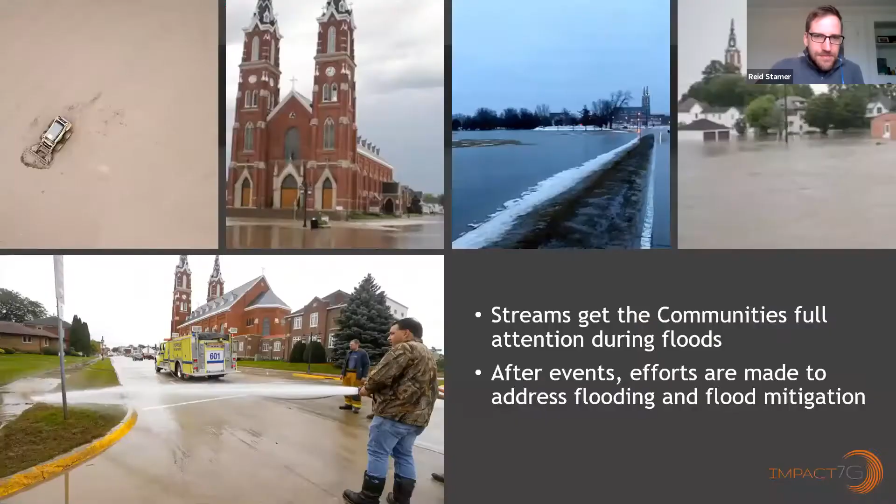And so, oops, sorry about that. Let me get started to look at the watershed that this project is located in. It's the headwaters of the North Fork of the Maquoketa River watershed, basically in this HUC 10 that goes, basically Dyersville is about in the center of it, down to Cascade.

And the city of Dyersville itself is at the confluence between Hewitt Creek, the North Fork of the Maquoketa, and Bear Creek. And if you can see in this photo, everything that you see that's hatched is floodway.

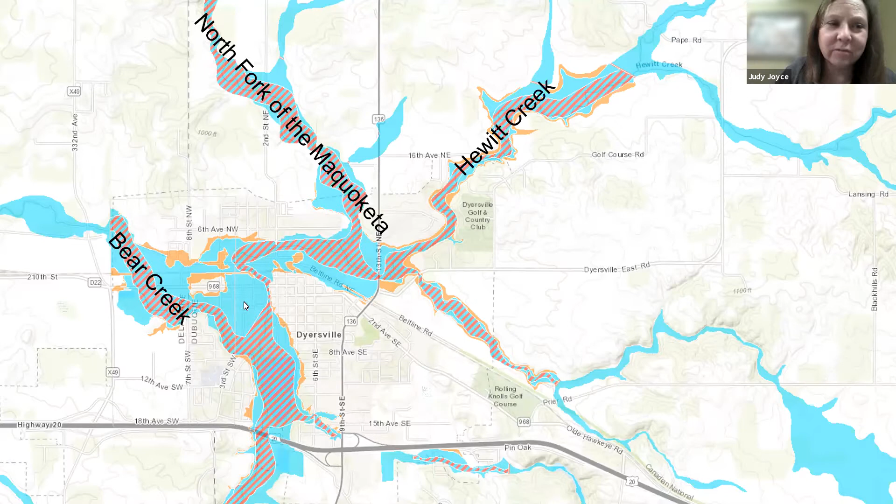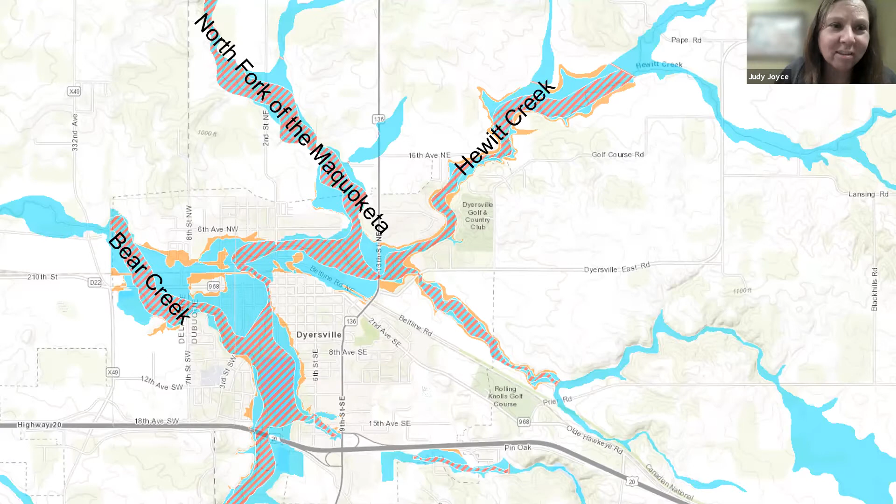And then everything in this sort of blue and brown color, that's floodplain. So if you can see here, the outline of Dyersville, I'm hoping you can see that on your screen, is like this, that they're very aware that the creeks are in their backyard. They're especially aware when it floods. So they've been flooded, you know, several times.

However, the rest of the time, which of course is most of the time, the creeks are not flooding and they're pretty much ignored. There's limited access to the creek. There's limited recreational opportunities with the creek. There's very poor aesthetics, and there's no real connection to the communities. The creeks are not a destination. They're not incorporated into the trail system, and really they have been ignored.

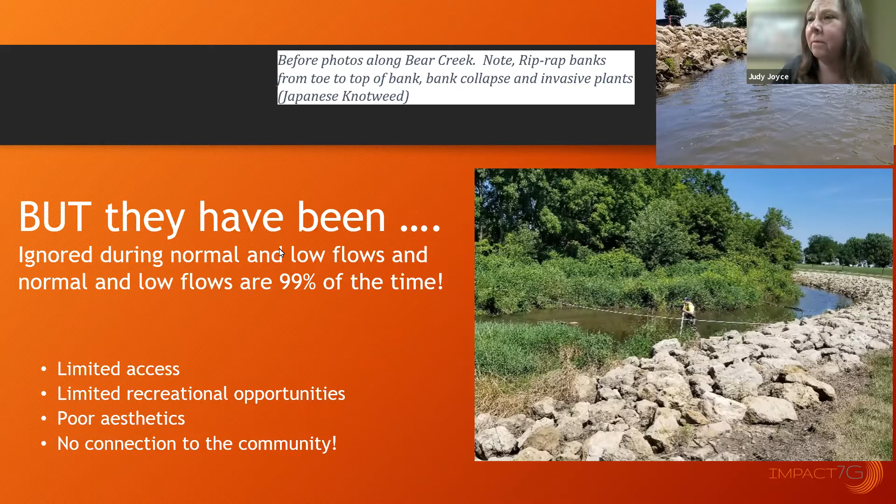And so when we met with the City of Dyersville, they were really looking at how can we change this? And we started making these different connections. How can we connect the community to the water? How can we connect it to the creek?

And the first thing we did is we rebranded the watershed. So this is sort of a new concept for me as a geologist, to start thinking of myself as someone who does marketing. But we basically gave this watershed a new name, and we called it the Field of Dreams watershed. And what this did is, when I would tell people about some of the issues in this watershed with water quality, with erosion, and that the community was trying to do best management practices to improve water quality and reduce flooding, it was hard to get people excited about it.

But if I said something like, hey, have you heard of the Field of Dreams watershed? And they'd be like, oh, what's that? And then I could go into my spiel. So really, just by branding the watershed and connecting it to the Field of Dreams, we were able to get some momentum and some energy behind the work that we were doing.

And so what started, sorry about that, what started some of these efforts was a brownfield redevelopment within the City of Dyersville. They basically took a contaminated site and cleaned it up, and then converted it, part of it is a brewery, the Textile Brewing Company in Dyersville. If you're in the area, please take part in the brewery. Enjoy the water. There's also a new housing development there. And then they were looking for ways to improve access to the creek.

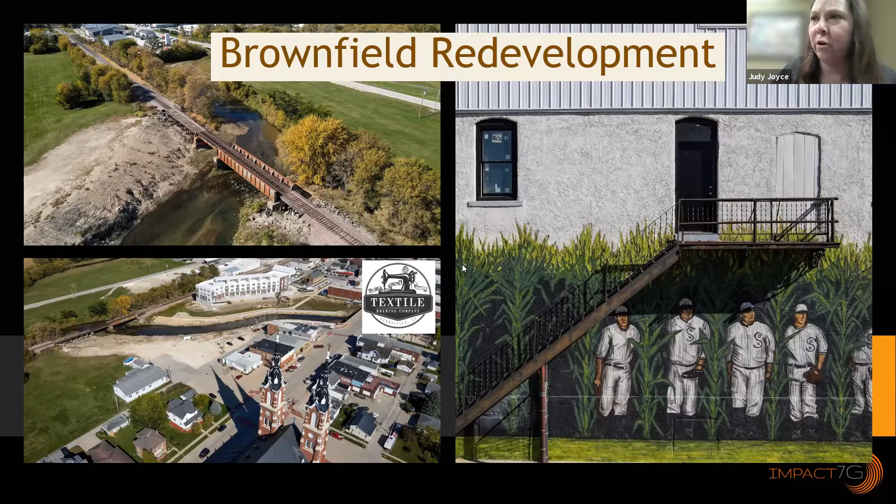And so we worked on a concept plan looking at restoring Bear Creek, which is this creek here, and the North Fork of the Maquoketa. This was the brownfield redevelopment area with Textile Brewery. And then they were looking at a little pocket park here. Their goals were to restore these creeks, to do some water quality practices with oxbows and wetland restoration, to improve access to these creeks, and to improve some recreation along those creeks.

Things like inner tubes, kayaks, wading in the creek, other sort of passive activities that you could do along the creek, with this sort of motto, again tying into that Field of Dreams watershed, that if you build it, you will bring people back to the water. You will bring people back to this community.

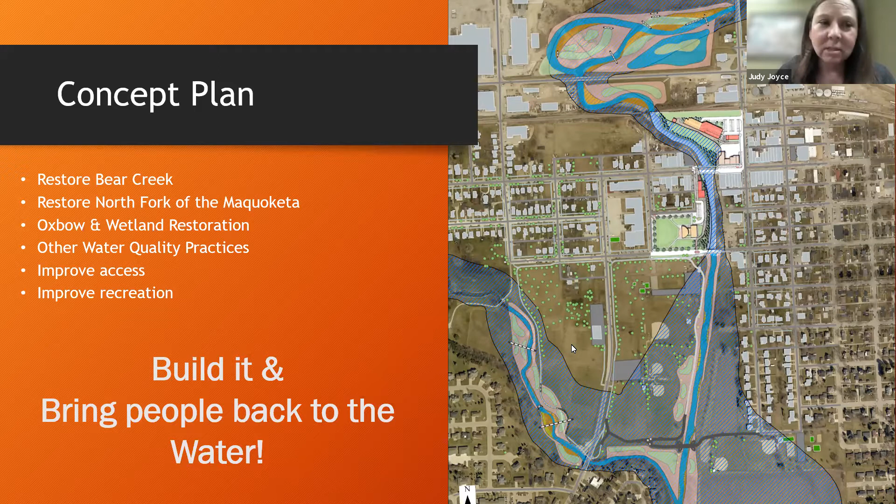And so the question came, where's the funding coming from for this? So at the time, they were working on updating their wastewater treatment plant, and they were using state revolving funds. And so with the state revolving loan funds, a lot of communities use this money to finance any water or wastewater improvement project. The nice thing is these are low interest and they're spread out over 20 years. So it's a great way to finance something if you don't have the capital.

But then not too long ago, they came up with what's called a sponsored project program. And what this is, let's say you borrow $1 million for a wastewater treatment improvement, and over time, your interest is going to be 1.2 million. What they'll end up doing is, rather than paying that money in interest, you could use that money instead for a water quality improvement project.

So in a way, it was sort of like free money. Instead of that money going to the bank or going back to the state in interest, you could use that money as a water quality practice. And this had been done to do things like pervious pavement, stormwater wetlands, biocells, but it hadn't really been used for stream restoration before. And that's what we wanted to use it for.

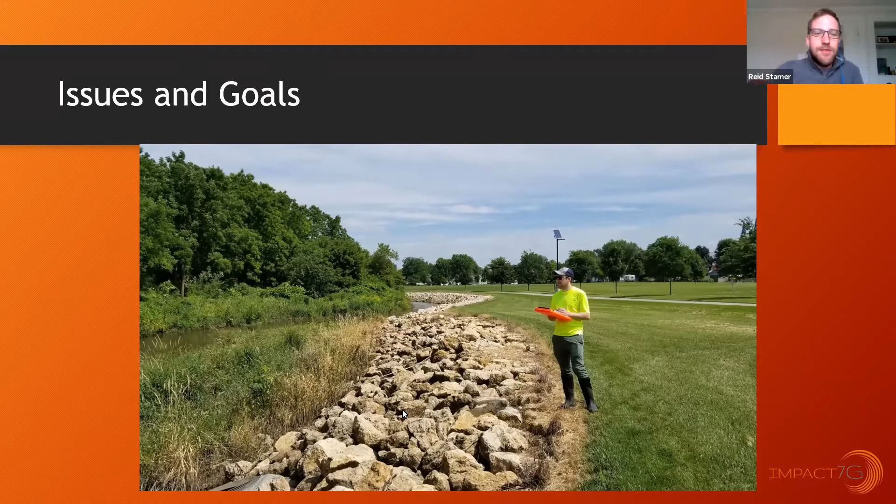Another issue that they were not aware of, and I made them acutely aware of it, is they had Japanese knotweed growing in one distinct patch along Bear Creek, and it likes to spread downstream by breaking off stems, and it'll root at every little node on this plant. So it was something we definitely wanted to take care of before it got any worse. So that was another issue. Next slide, please.

And yeah, there were some issues with how the channel had been migrating. It was actually trying to self-adjust in some areas, but because of the amount of riprap and rock they had put in, it added a constraint so that the stream wasn't able to self-adjust and do what it is supposed to do, which is good. It means that the stream is working or trying to work, so we just need to nudge it in the right direction.

And then some of the other issues would be other erosion control methods that maybe weren't sanctioned, where they just dump concrete in. It's something you see on a lot of stream banks, where they put these big flat stones that are just old sidewalk. They're really, really bad at holding stream banks together because the water can still flow beneath them and pipe underneath. So that was another issue.

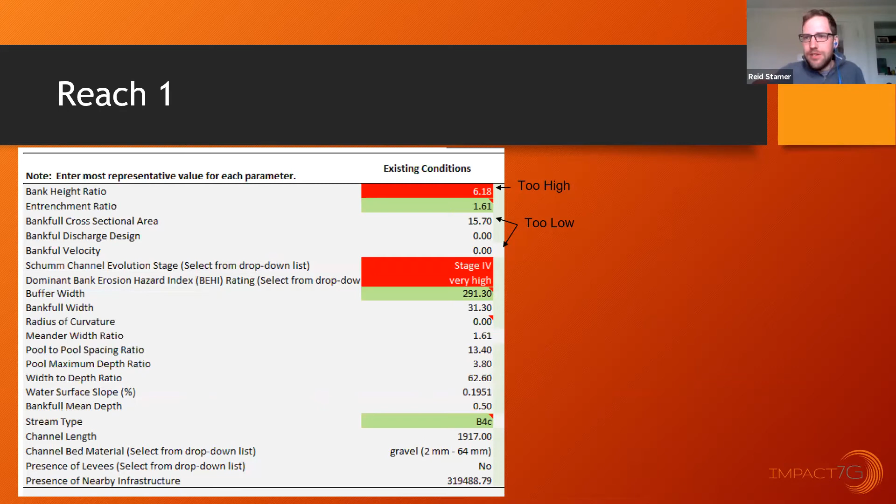So we took all our measurements, filled out the spreadsheet, and turned it into the DNR to Nate Hogeveen. He's the river coordinator, the guy who reviews all this. He looked at it and said, this bank height ratio is crazy. It's way too high, the cross-sectional area is way too low, and the velocity is off the charts too low. And I was just like, okay, well, what ranges is it supposed to be in? How does the toolbox actually work? So he gave us some suggestions to try to tweak that.

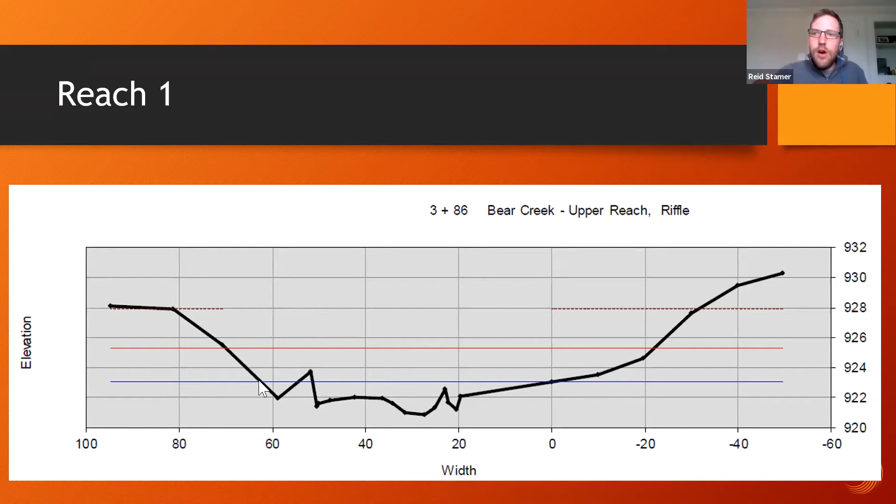If you can see on this, the blue line is what we were calling our bank full, and he said, well, it's way too low. You'll see on the next slide for Reach 2, it was really a similar thing. The bank height ratios didn't make sense if you look at similar streams with similar watersheds. Next slide, please.

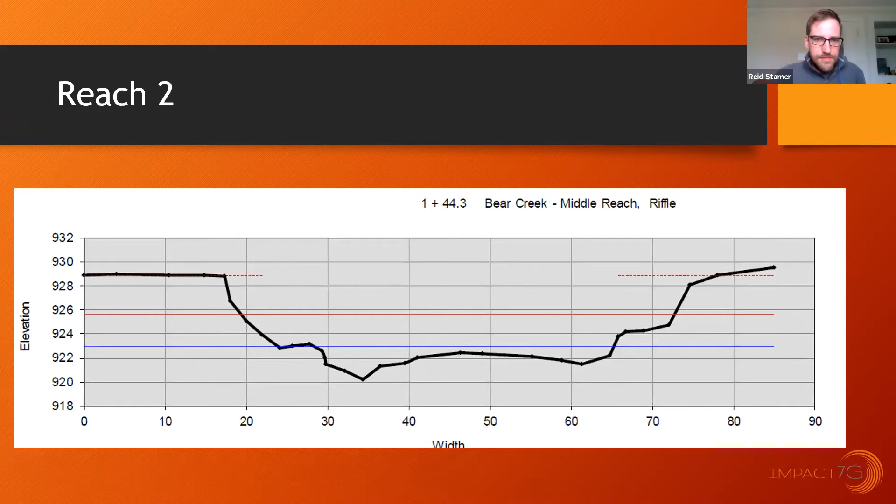So like I mentioned, he basically said our bank full calls are likely low. And in a degraded stream like this that's been really messed with, bank full is super hard to find at times. So what we were seeing in the field was actually something called an inner berm. It's another depositional feature that's usually lower, obviously, than bank full. So he suggested just raising it to another reasonable area. And it actually happened to coincide with the top of the bank, which was very convenient.

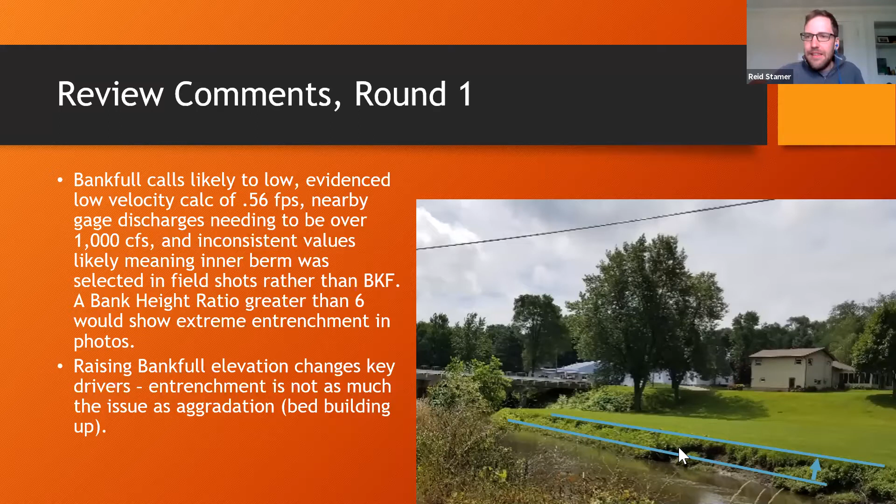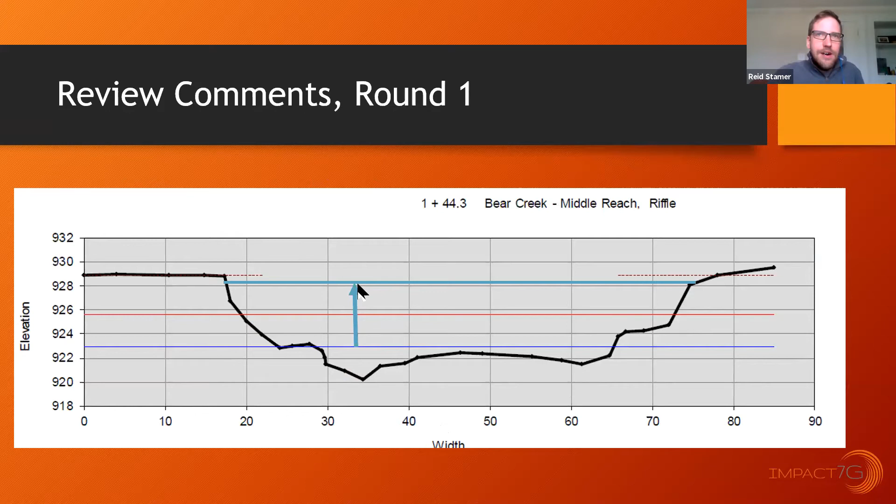And then when we reassessed that, the numbers started to make sense. You know, so if we move it from way down here where your cross-sectional area is itty bitty to up here, the numbers start to pan out a little bit better. So you can see the bank height ratio is 1. That's what you want, you know, if the other ones where it was like 6, that would be like a canyon that you would be in.

So once we sort of figured out where our bank full ought to be, we were able to sort of start playing around with some of these existing conditions, where in the red it's flagged as, you know, this is not functional. Yellow means that it's somewhat functional but needs to be addressed, and green means that it's typically something that's functional. And where it says regional curves, this is an old iteration. We didn't have these in the toolbox yet, so it's sort of irrelevant anyway.

So we were able to sort of address some of those issues. So we knew that, you know, could you actually go back to the previous slide? Sorry, Judy.

We knew that this Schumm channel evolution stage was non-functional. So we wanted to get it to something that's more stable. We flagged, very importantly, that the radius of curvature was way too tight and that those needed to be adjusted. And we had some issues with the pool-to-pool spacing. They were too close together and they needed to be a little bit further apart.

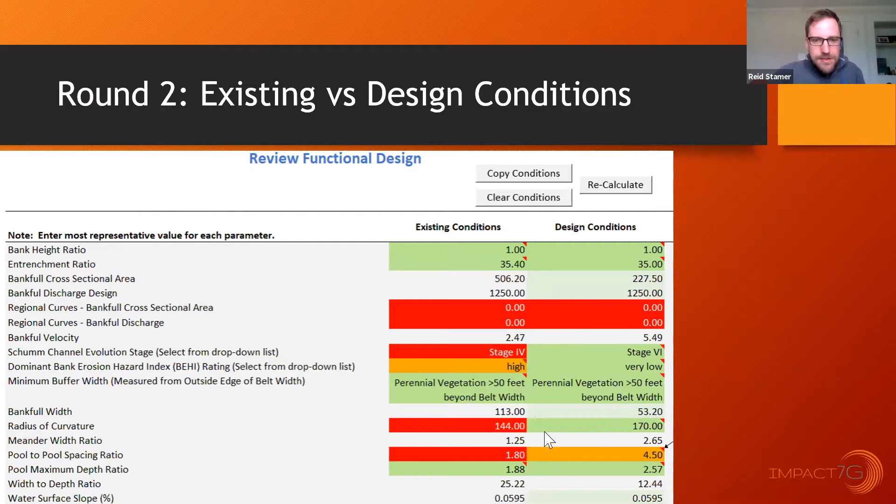We ended up using stone toe protection, some cutoff sills, J hooks, partially because we had all of that rock that was excessively along the east bank that we wanted to reuse and sort of recycle instead of just hauling it off or burying it. It just seemed like a more sustainable approach to restoring the stream.

So the initial impacts of the toolbox on the project: we were able, like I said, to reduce the amount of riprap, and we reused all of it somewhere on it, or left it in situ when it was appropriate. And we were able to build structures out of it. One of the key things we really wanted to do was sort of make it easier for the neighborhood kids to access the creek. Even as a fully grown adult, it was very difficult climbing those banks and not falling in, or trying not to twist an ankle just because the rock was unsorted. It was very large. And so access was really a key thing.

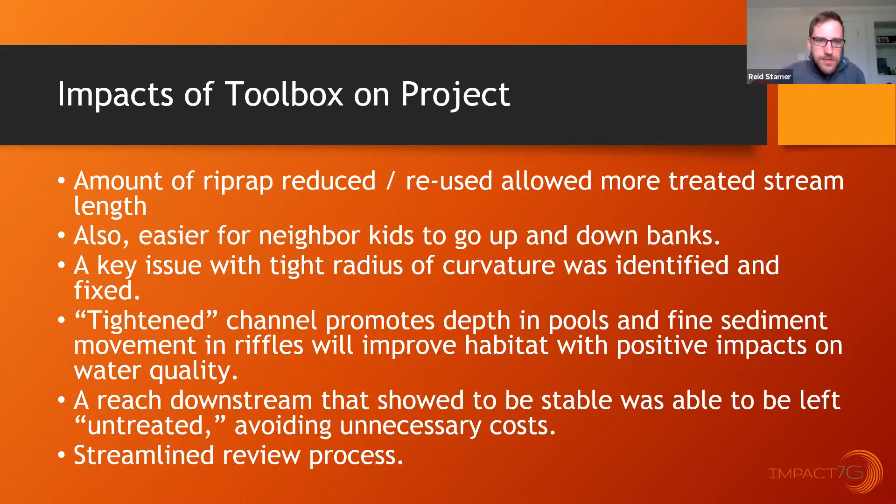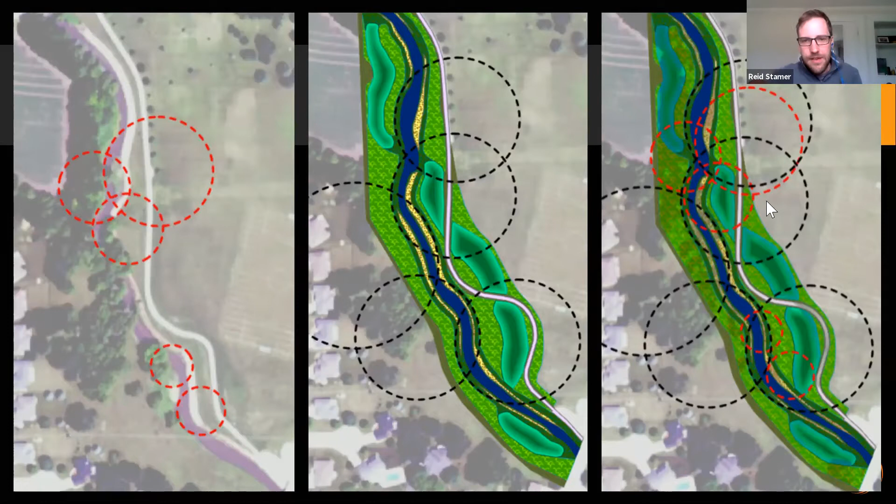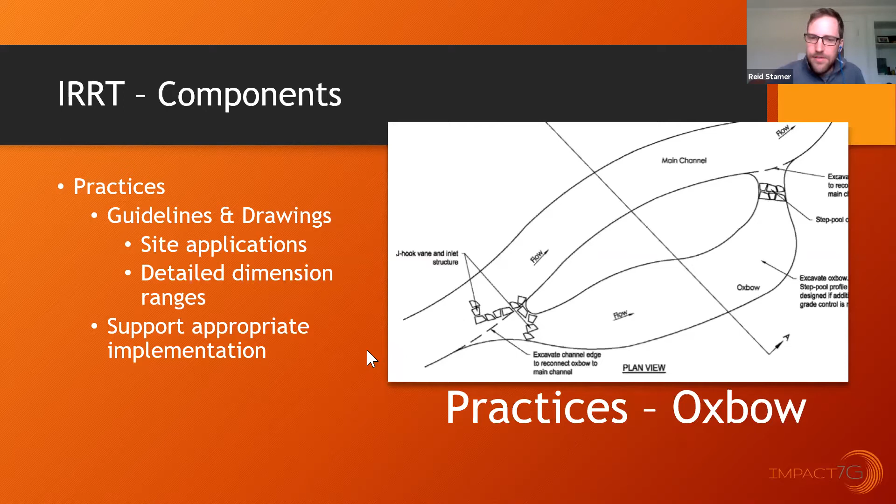So the other half of the river restoration toolbox is that you have your assessment and you do your design, but it also includes these really detailed drawings of the various practices. And like I said, they're supposed to be used in conjunction with one another. It's not a, hey, let's just use stone toe protection and we'll restore the creek. So in this instance, this is for installing an oxbow or an off-channel meander. The recommendation is to use a structure called a J-hook in combination with that to help maintain the integrity of the oxbow and reduce some of the deposition into it.

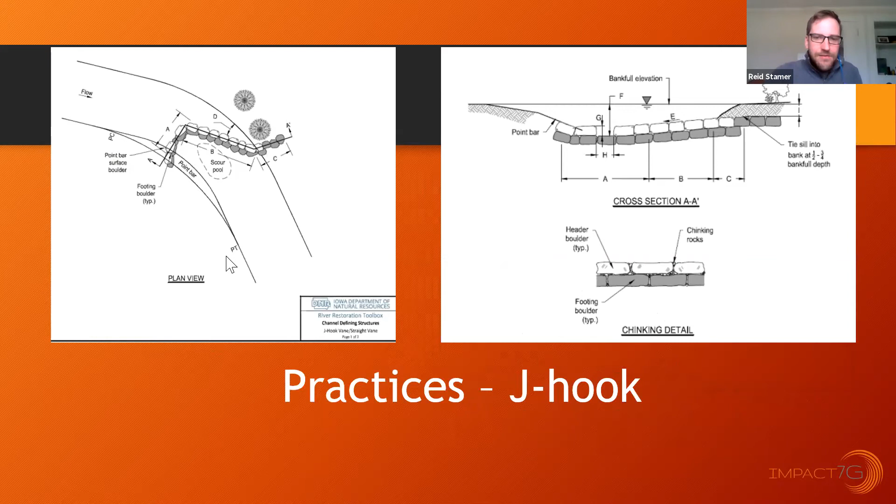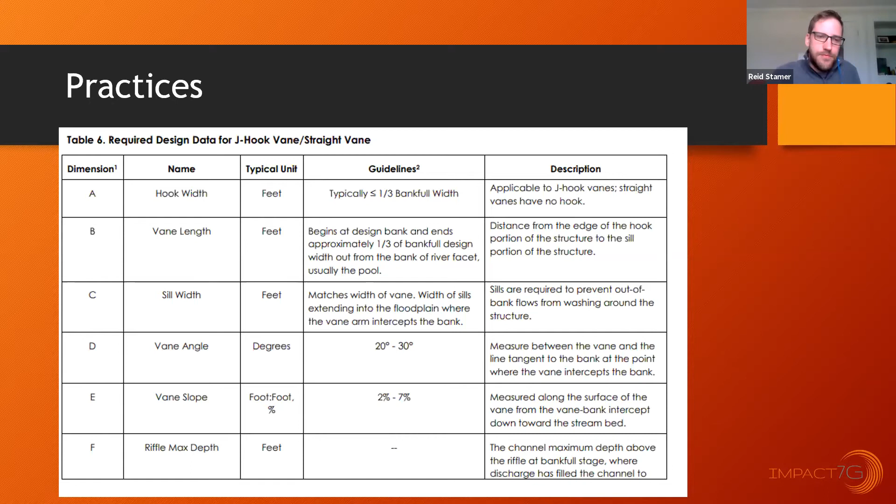So you have your oxbow drawings, but you can also go and look at the detailed J-hook drawings, and it has every single dimension that you could possibly imagine. It has your plan view, your cross section as well, and it tells you exactly what each of these are and how to design them appropriately. So your J-hook should be about 1/3 of that bankfull width. And these are also in CAD as well. So for the designers out there, you can just directly import these drawings and start tweaking them and playing with them to fit your project. So it's really handy to have.

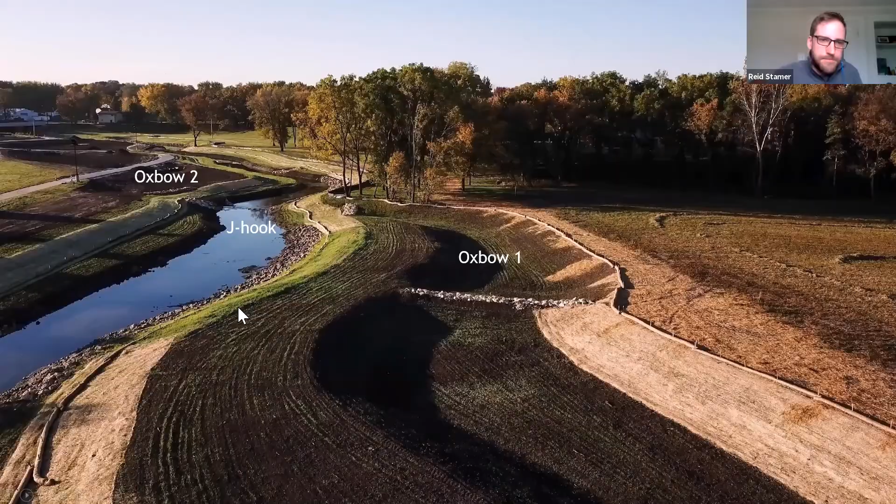And the J-hook functions to basically tell the stream velocity, where the stream is flowing, to keep it in the center of the channel, to not blow out to one bank or the other. And it helps protect those banks so that at those higher flows, when it goes into Oxbow 2, it's not going to erode the inlet here. So it keeps that integrity. And you'll also see there's some of that stone toe protection as well.

And this is another really nice part about the toolbox that we discovered was handy. As we were working through this, when talking with the actual contractor who's moving the dirt around, he told me there's no way, with how sandy and how loamy these soils are, that if we just build a bank, it's going to stay put. And that's something we initially had in our drawings, and we decided to take them out because I wanted to allow a little bit more flexibility in there to let the stream readjust. But when you looked at it in the real world, it didn't make sense to allow it.

We had lots of utilities running through here and adjacent to here, and we needed to shore it up a little bit more. But since we had the toolbox and we already had practices that were flagged for being useful, I could look through it and say, okay, well, we need something that's going to help shore up the stream bank. But I still wanted to allow that flexibility without having the banks be totally armored with rock.

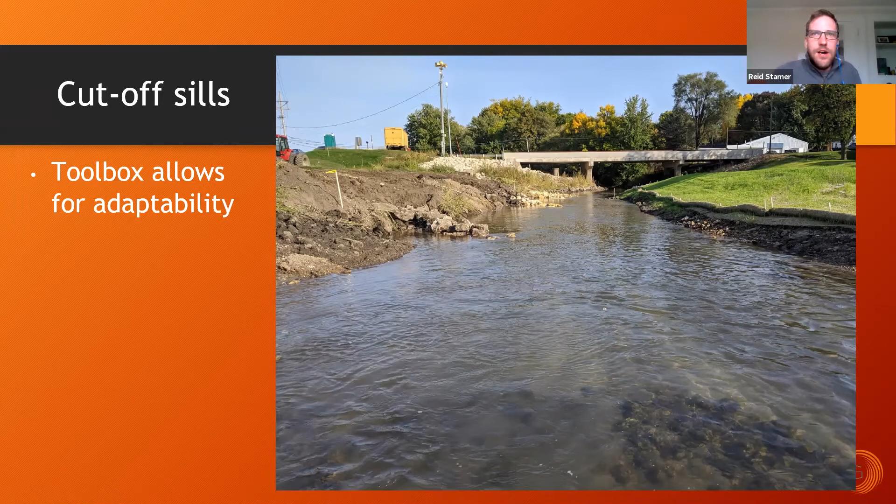So these cutoff sills are basically just, you put one in every 30 feet, it's slightly angled upstream. There's a little bit of deposition that happens behind it, but it basically keeps those flow vectors in the center of the channel and away from the bank. The channel has room to sort of meander back and forth as it wants within the constraints of the cutoff sills. So it was sort of a sweet spot of protecting infrastructure, but allowing the river to do what it wanted to self-adjust. So it's a nice adaptable thing to use.

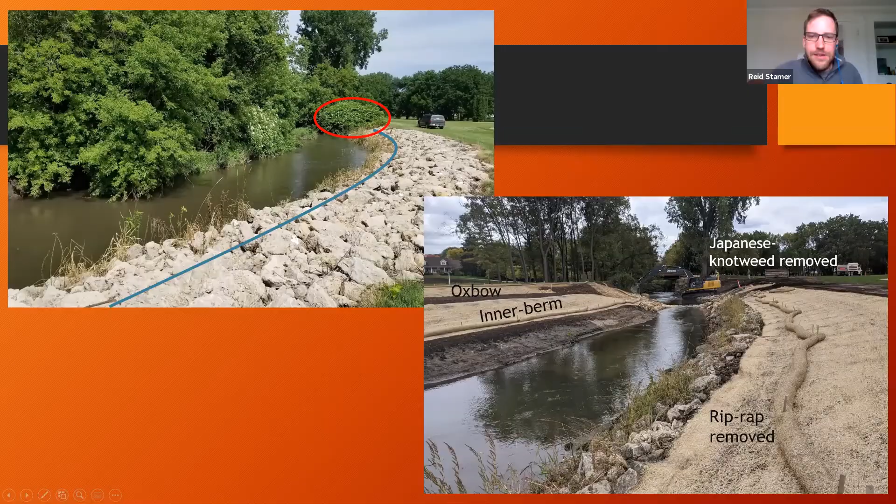You'll note that we removed the riprap above about that half bank full elevation, because as I mentioned earlier, it doesn't really do a whole lot above a certain elevation. So it's protecting this bank without being excessively rocked, and it's a lot easier to get down to the water if you need to. And then you'll see on the left, there's some inner berm structures in an oxbow. That would be Oxbow 1 for reference.

And just some more pretty drone footage, because it's pretty awesome that drones are so readily available for photography, at least for, I'm a geography guy, so aerial views are how I sort of view the world. So it's been really handy. So this is another structure that we used in here called a cross vane. And this is another photo that just sort of shows a good chunk of the stream. It's got this nice gentle sinuosity to it.

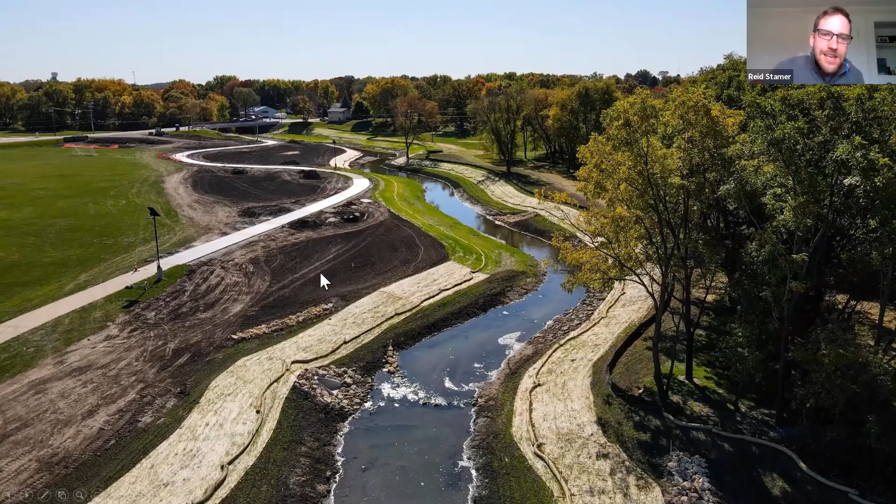We actually also rerouted the bike path through here. So those areas in black dirt in this are oxbow areas. So it's sort of a cool experience. And I'm really hoping once the native plants pop up that you go from park to pollinator habitat to right next to the creek and back in. And I'm really excited to see how it sort of pans out over the next couple of years when the flowers show up.

So again, we had all these different things fall into place to get the Bear Creek project going. And now this Bear Creek is a launching point for some other initiatives that are happening. So what we did is we've come up with a Field of Dreams Watershed Initiative, which is basically a vision plan to show where the city of Dyersville wants to go from here. We're using this to build some community support and to energize that community and the businesses to get them to buy in and to support these projects.

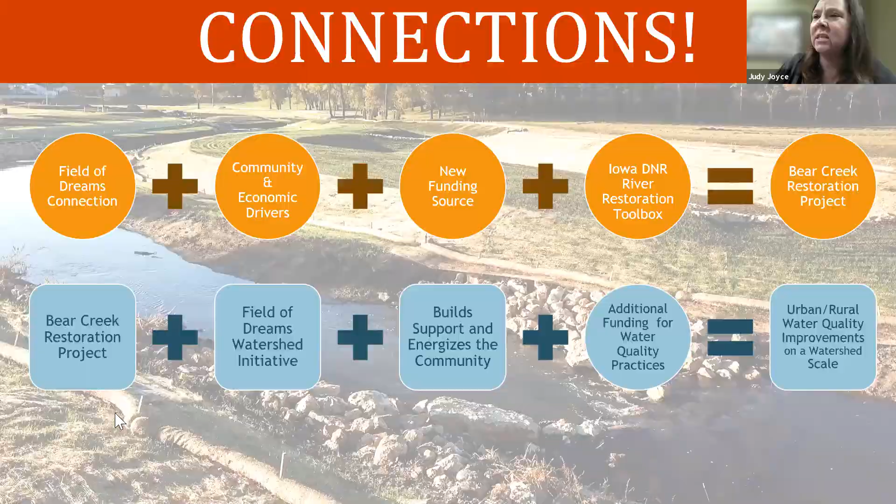Intensely do this. So rather than some practices within the watershed, this is really looking at it, I want to say aggressively looking at it to see what we can do. So what our current vision is within city limits is to basically restore each of these reaches. Sorry about that. Each of these creeks within the city limits.

So we have Bear Creek, North Fork, and Hewitt Creek, with the idea that we're going to go through and do restoration activities along the entire reach of creeks, which is about 3 to 4 miles, and then also restore about 200 acres, 150 acres of wetlands through this with additional best management water quality practices.

So to really embrace the creeks, make this a community, connect to the Field of Dreams through Hewitt Creek. So Hewitt Creek goes actually right by the Field of Dreams. And the idea is that we'll use that creek as a connection between the Field of Dreams and the downtown city itself.

So these are all the people that were involved. IDALS, DNR, IIW was the engineer out of Dubuque, the Maquoketa River WMA, the city of Dyersville, Steger Construction, which was great. They're a local contractor who worked on this. So they had a vested interest in making sure this was a good project. And then our team at Impact 7G.

And what I'd like to do is I'm going to show you a video. And let's see if I can bring that up here. There we go. And this is just a short video that we did for the city.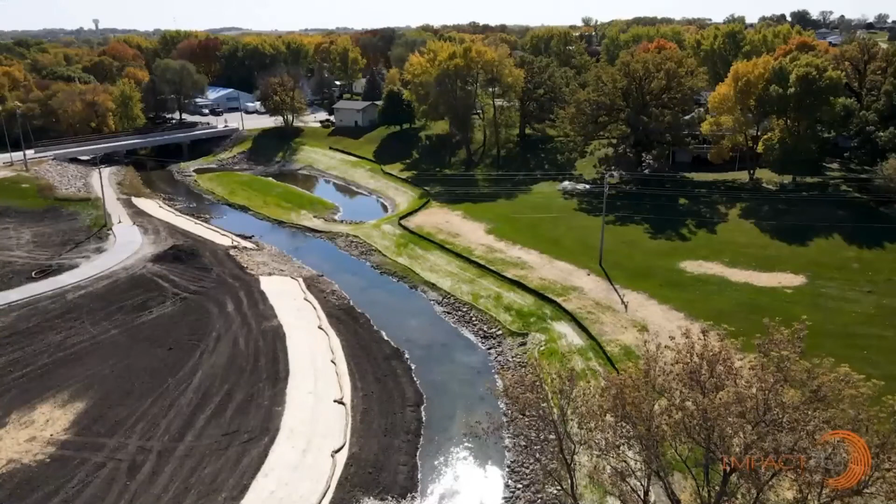Very exciting. So as part of the stream assessment, we went out and surveyed the stream, we took cross sections, and we counted pebbles. And my pebble counting buddy was Reed Stommer. He's our stream restoration ecologist, and he can tell you all about what the different structures are and how we came up with the design. I'm Reed Stommer, a stream restoration ecologist for Impact 7G.

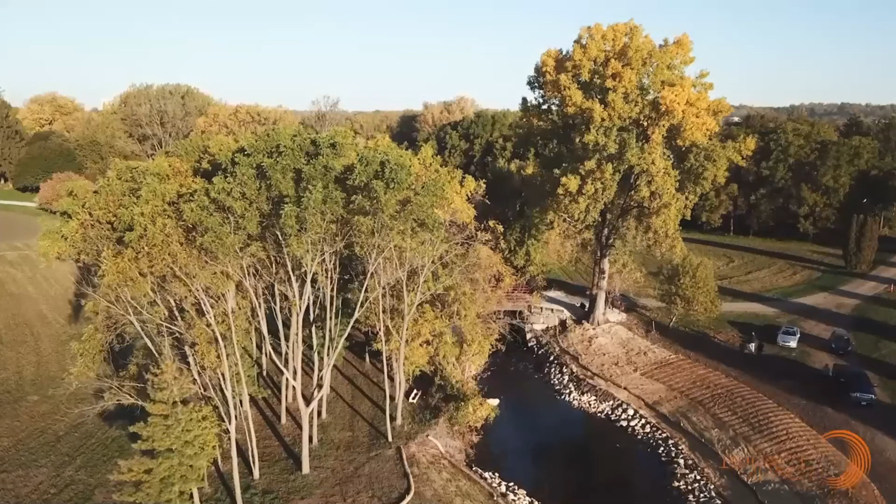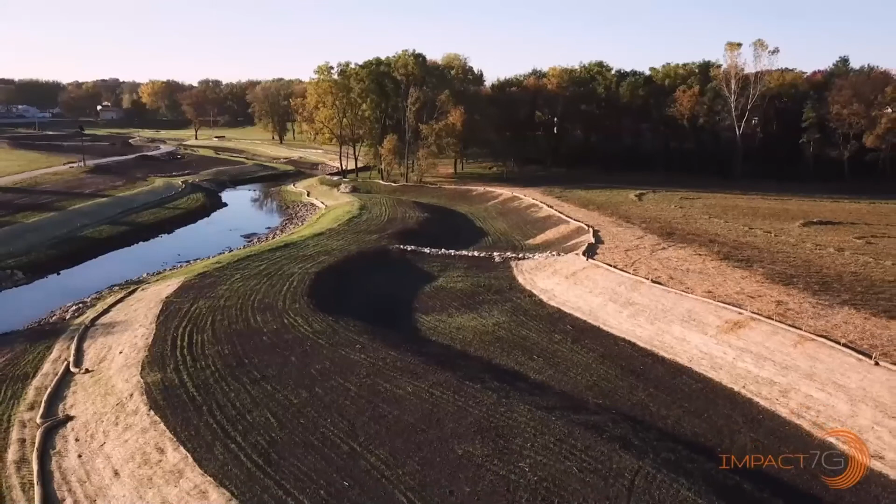When I first came out to Bear Creek, my initial impressions were, it's a highly urbanized stream, and obviously it runs through the middle of the city. There's a lot of riprap on the banks, and there's definitely room for improvement. The project was proposed to have a restoration that would provide stormwater quality improvements, and that included oxbows, different structures in the river, vanes and sills and linear deflectors into the stream flow.

This was put here at the northern extent of our project for several reasons. One is that it provides really great consistent grade control. So if this bridge that's further upstream gets replaced in the future and the riffle that's under it gets taken out, it's not going to change the dynamic of this stream right here. It also helps direct the flow to the center of the channel, reducing near bank stress on the stream banks.

At low flow, I'd say it's about 2.5 feet deep, so it's a great place for fish to hang out. It provides a nice place to cross when there's low flow as well. And it helps oxygenate the water. So the Bear Creek Restoration Project is just the first project in the overall Field of Dreams watershed vision plan. We started with Bear Creek.

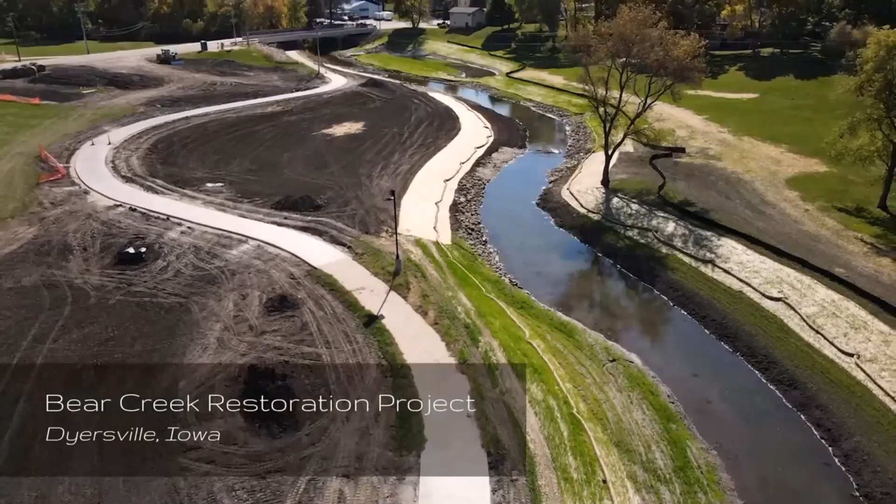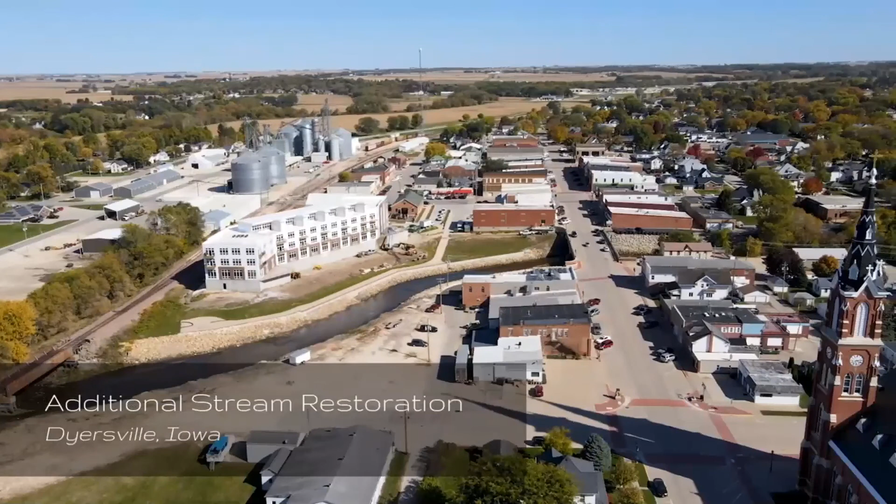We're also going to do a stormwater wetland along the North Fork of the Maquoketa. And then there's a whole larger plan to look at additional stream restoration, additional wetlands throughout the whole city of Dyersville. Going northeast out of town will take you to the Field of Dreams.

And if you wanted to, you could actually walk Hewitt Creek. Hewitt Creek comes up and meets up with the Field of Dreams about 3.5 miles out of town. If you go from the Field of Dreams and you walk the creek down, you would then go into the North Fork of the Maquoketa River, and then you would go through downtown and then through West Side Park.

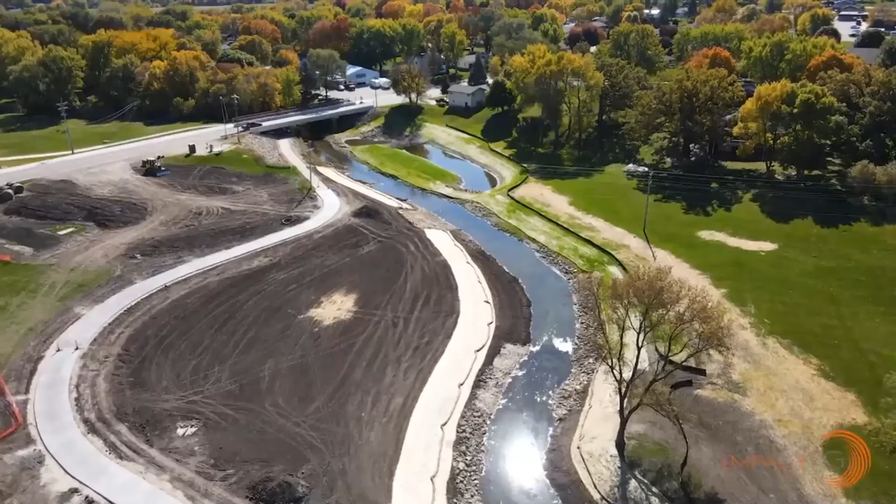Well, I think the Bear Creek project really will be the first of many projects in the next 10 years. I think it's ahead of its time because of the fact that it does offer an educational component. It does offer the benefit of economic development opportunity to our downtown to really create a destination for people to show up and utilize. And finally, I think it also offers water quality improvements to our area and helps reduce tax burdens of flooding in future events.

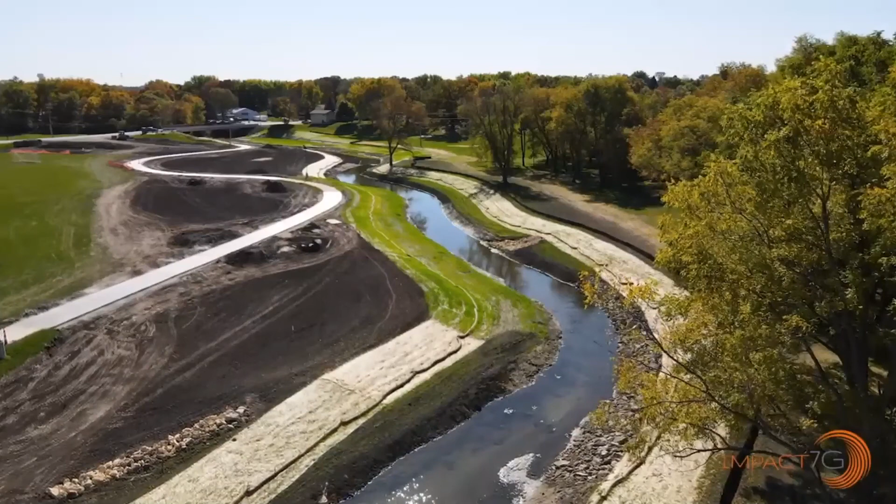The City of Dyersville worked with Impact 7G and IIW to develop a vision for the future. Future improvements such as stream improvements, wetland improvements, native planting improvements. These are all slated to take place along Bear Creek and the North Fork of the Maquoketa. The team of IIW and Impact 7G was an enjoyable experience, and the local community and the government trusts us as a team working together.

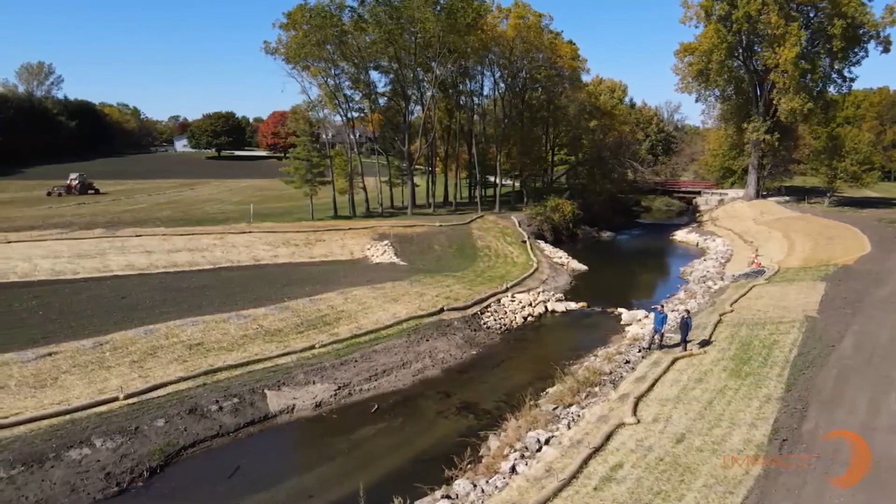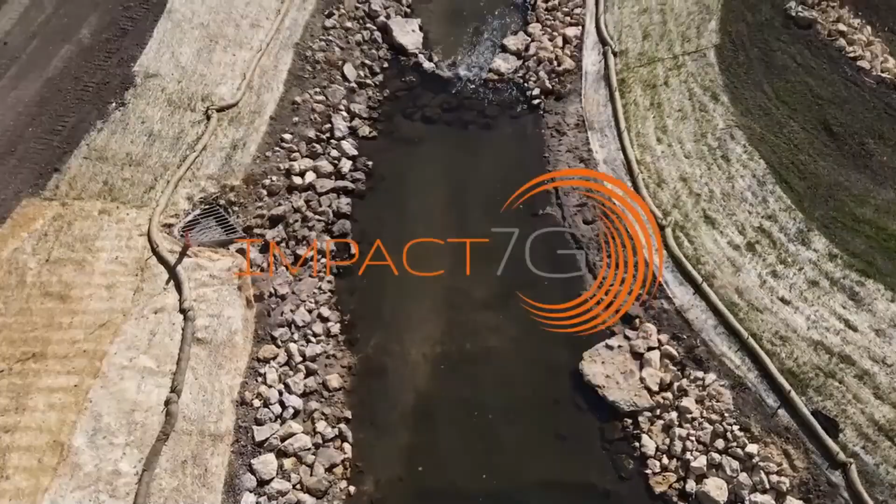Again, when we think of watersheds, we think of those connections, we think of those water trails, we think of those as ways to connect not only water, but to connect people, to connect economic development, to connect recreation. Basically, it helps us make those connections. It helps us to make sure our designs are right. It makes sure that it incorporates all these different layers of water. Again, that's why we think of this as a one water, one watershed, one community at a time approach.